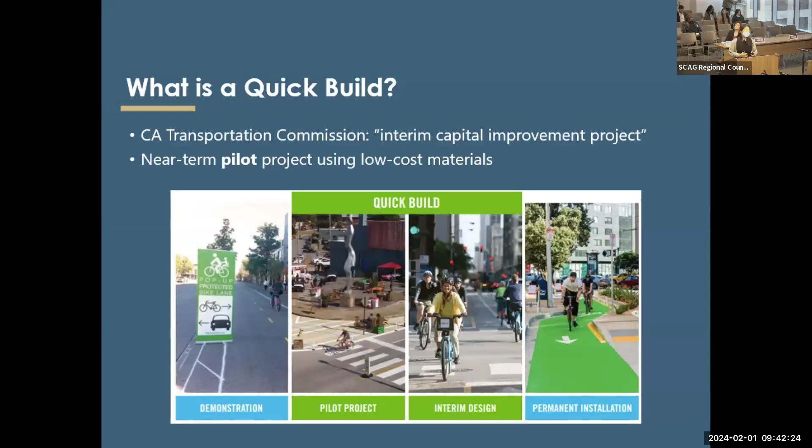So quick builds fall in the middle, a pilot project or interim design, again using those low-cost materials, which I'll get into in the next slide.

Getting into the elements of these low-cost, easy to implement or easy to uninstall elements: for protected bike lanes, you can put that protection either with planters or parking or using plastic posts. For a traffic circle, using rubber curbs, plastic posts are very handy for various types of projects, also using signage. For a protected intersection, you can use paint and plastic posts to create curb extensions, inputting temporary pedestrian refuge islands, or using pavement markings. Also there's temporary transit platforms and interim shared spaces such as pedestrian plazas using barricades.

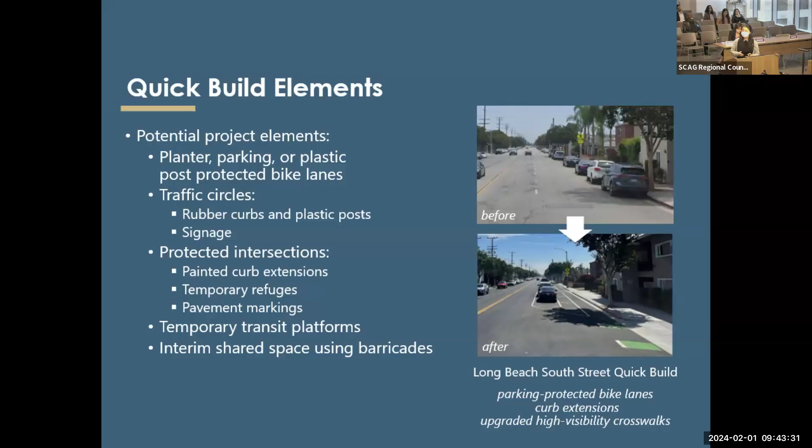On the screen on the right, there's an example from the city of Long Beach on South Street. The top is the before - there are 2 lanes of vehicular traffic and curbside parking. With just some paint, the city was able to implement a parking protected bike lane. Outside of the photo, they also installed curb extensions using paint and plastic posts and upgraded their crosswalks to be high visibility.

The quick build process starts with extensive community engagement, also to understand existing conditions and what are the community priorities and challenges along a specific corridor or project area. All of this engagement informs a quick build design, and then a jurisdiction will implement the project. It can range anywhere from a couple days to maybe a month or two, depending on the scope of the project. After implementation, a key part of quick builds is to have evaluation.

Evaluation can take place anywhere from 1 to 3 years post-implementation. Really the goal of evaluation is to inform next steps, whether it's modifying the project, removing the project due to the actual materials reaching their end of life, or going through a process of refining that design and maybe getting a permanent installation. That process typically takes 1 to 5 years.

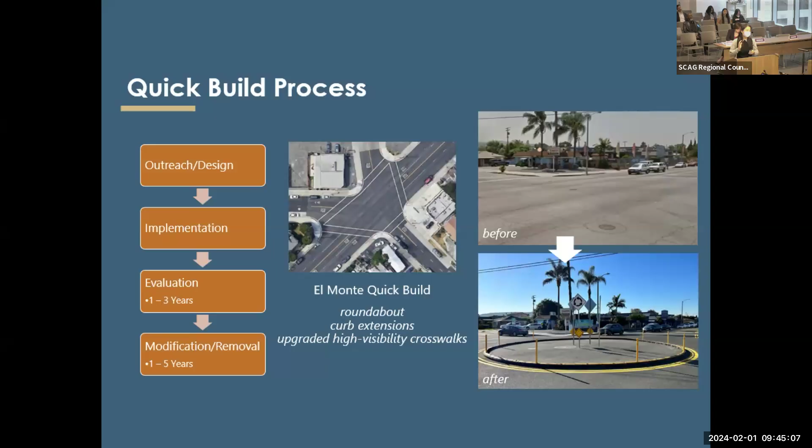Another example on screen is in the city of El Monte. They implemented a quick build roundabout. You'll see that the intersection is a bit challenging, with 5 approaches at a stop controlled intersection. So the city is piloting a roundabout using plastic posts, rubber curbs and signage. From the street view, you can see that intersection has a lot of open space, but with this roundabout, they're able to fill that space and help direct traffic. The city is in the process of implementing that, and after about a year, we'll undergo evaluation.

So my last slide for this introduction, I wanted to share some of the projects going on in the SCAG region. We've got a few completed in Beverly Hills, Calexico, Hermosa Beach, Long Beach, Los Angeles, and Ojai. I wanted to show some photos, a little more interesting than just talking about them.

So on the top, city of Ojai used planters to create a parking protected bike lane. This is informing an ATP grant application for them to figure out what their final design should look like.

And on the bottom, in the city of Calexico, their quick build is a pedestrian plaza where they blocked off a street with barricades, and partnered with the Bloomberg Institute to add street art to really activate the space. Again, we've got a few in progress.

So the photos I showed of El Monte, we also have projects going on in Pasadena and Glendale. And finally, projects in progress and upcoming for installation, currently in the design and outreach process, in the cities of Pomona, Los Angeles, and Santa Monica.

So now I'll turn it over to Margot to talk about a more detailed process for the city of Los Angeles. The magic button—it's that right one.

Okay, yep, excuse me. Good morning, really an honor and a pleasure to be here. I purposely wore red—it's a gray day out there, and I see a lot of black, so I wanted to make sure I stand out. So welcome, everybody. Hope to keep you on your toes for the next 15 minutes or so.

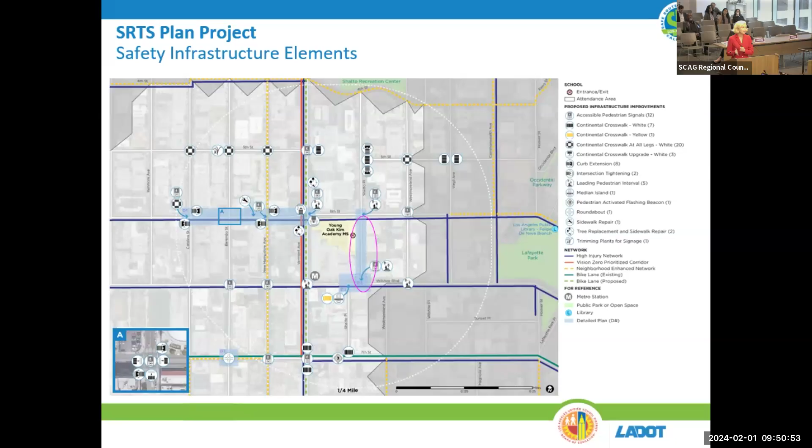Punchline, the answer is yes. So what were the issues we were dealing with on Shatto Place, where the school's main entrance is? The school is on the right. On the left side of the street, we have the headquarters for a union organization, a lovely cafe, and at the end of the street, an apartment building with over 500 units. So the primary client on this block is truly the 800 student population. However, through the process of engagement, we really got to know all the diverse stakeholders.

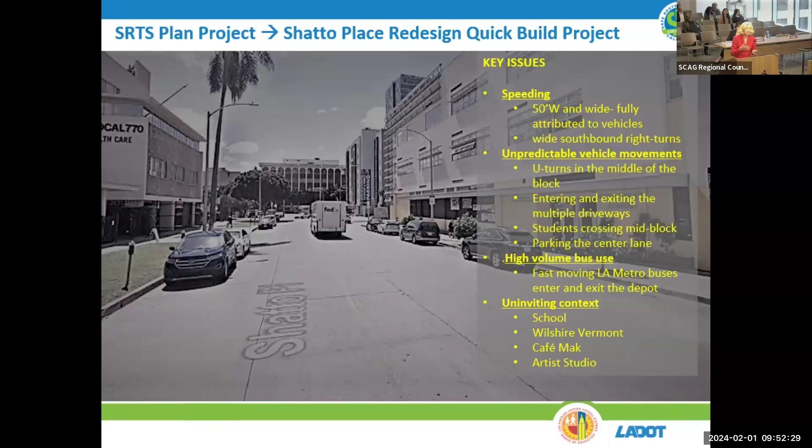What are the issues? Hopefully this looks rather noir, our black and white of Shatto Place, but there are couple key issues. One, it's a 50-foot wide street with some decaying striping, basically a 50-foot runway for anybody to travel how they wish. There's southbound traffic, northbound traffic, and a central lane used as parking for waiting parents, for delivery trucks annoyed with congestion, and multiple other uses. Many parents were observed doing U-turns as they came off the school curb, turning around and heading the other direction. Likewise, a lot of dropping off children on the other side of the street from the school, doing U-turns, and a whole mishmash of vehicle behavior, with 800 kids exiting a school making for a bit of a mess.

So we did some concepting. One of the things to drive home about a quick build process is you build time and labor into going through multiple iterations, because part of the joy of quick build is the iterative concepts. This is the one we landed on, our third concept plan. In brief, I guess you'd call that a peachy color.

We basically took out the parking lane on the west side of the street, right in front of the school's main entrance, and converted it into a pedestrian plaza area. We added a yellow lane representing a dedicated pickup and drop off lane, which operates only during pickup and drop off times. It is not a through lane. Then subsequently a southbound lane and a northbound lane.

To put this in context and think about why we're gobbling up street space for more pedestrian use: of the 800 students at this middle school, we did a student travel tally, and over 60% of these students use transit or walk to and from school. That's a fairly large population out there twice a day, yet that 50-foot width of street was solely dedicated to vehicular movement. So how do we find a better balance between the true use of mode use on that street?

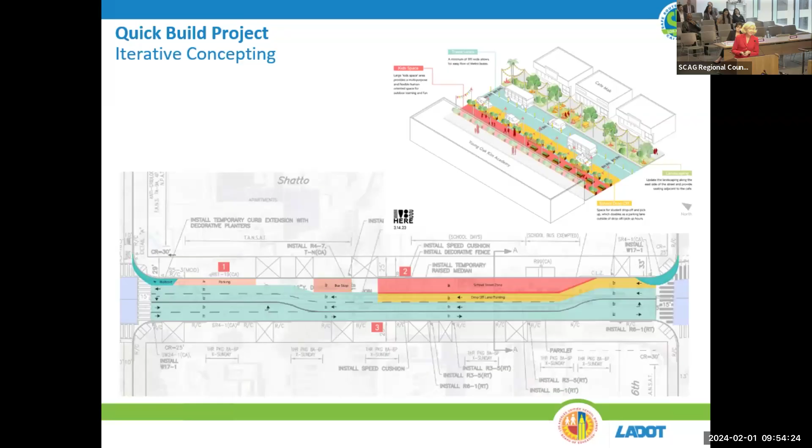And this was the design that evolved. In addition, we were testing out curb extensions on the north and south ends of the block, and we're pretty excited about this plan, as well as doing some additional greening.

So I'm going to walk you through several of the elements within this quick build project and why we were doing them. As I mentioned before, we're talking about a really wide, kind of unorganized 50-foot wide street. The idea was to streamline, organize, and make more predictable those vehicular movements so that when the kids came flooding out of the main entrance.

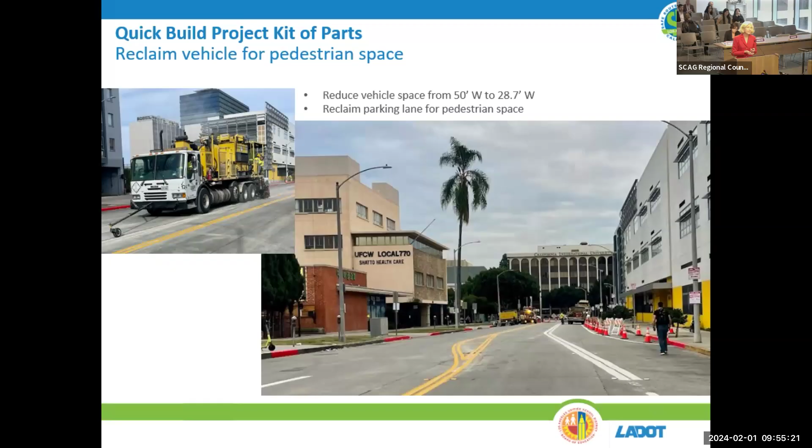So what you see is a double white line indicating the exterior barrier of the future pedestrian space — I'm sorry, where the orange cones are is the pedestrian space. The double white line indicates the valet lane, and then we restriped the double yellow line. Again, we took our vehicle lanes from 12 feet down to 10.5. So ultimately, we ended up with 28.7 feet of vehicle space as opposed to 50.

To reinforce where the vehicles go, we applied vertical delineators along some of those striped barriers. You'll see that the pedestrian space, which has the yellow polka dots, also has a vertical barrier, as does the barrier of the dedicated valet lane. So once somebody is in a dedicated valet lane, they are not leaving it, should somebody be a little bit slow at the front of the valet.

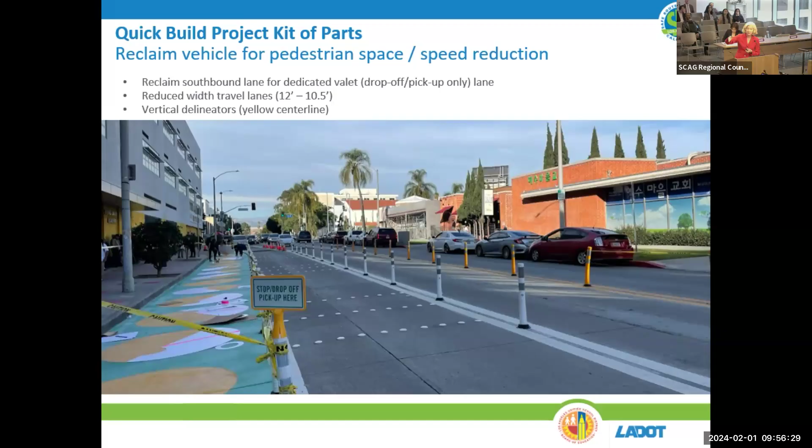Similarly, something new, we actually put yellow vertical delineators down the center line. It was really important to mitigate all of that unsafe U-turning. And what this does not represent, because it just went in yesterday, is that we have actually strung yellow plastic chain all the way down the center lane over those delineators, again to mitigate students getting dropped on the other side and trying to cross between the delineators. Similarly, we have strung the edge of the pedestrian space with a white chain.

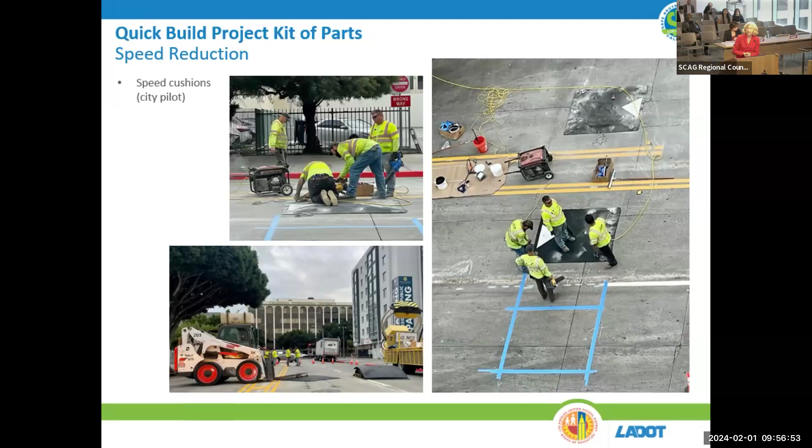Also, a great opportunity to pilot something that we in the city of LA have not done, perhaps some of your other cities already have, which is to install speed cushions or speed pillows, a quick and easy way, basically an instant speed hump. Good exercise in trialing those. We had 3 rows of those installed in the block.

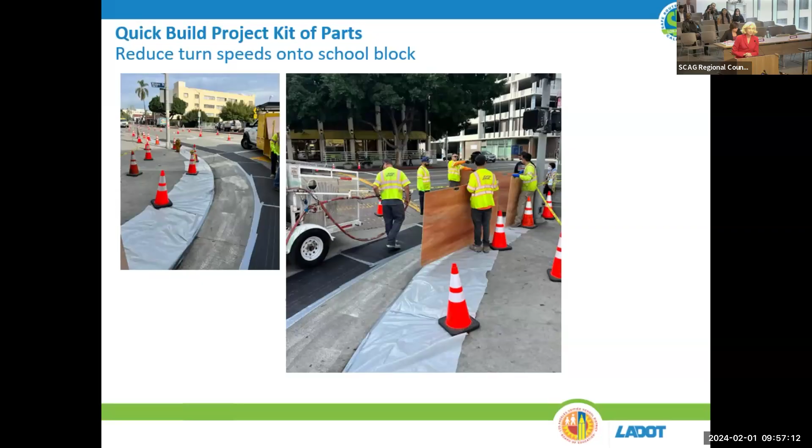Here are great crews at work installing the curb extensions. Generally, they are done with striping and some vertical delineators. We opted to also color them in with the same color of our pedestrian plaza for another punch of color on the corridor. And in the spirit of punches of color, it's one thing to do your pedestrian plaza below the curb - that's sort of a quick build way of grasping and installing a plaza. We said, why not run some of that colorful design up over the curb and onto the sidewalk?

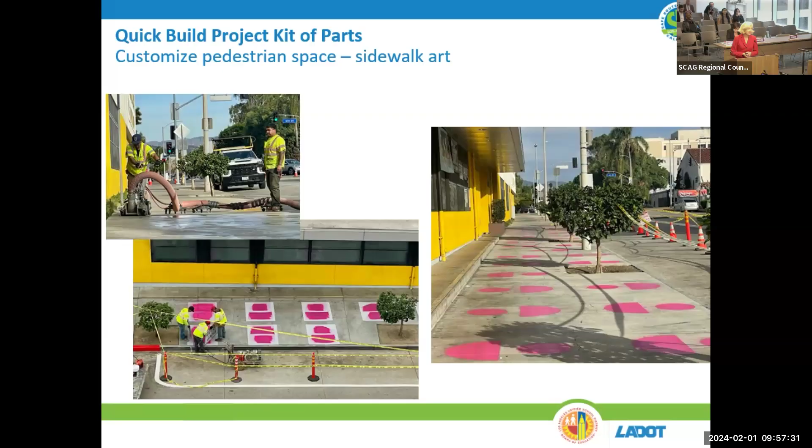So we stenciled a fun design on the sidewalk, which also connected with the yellow dots on the pedestrian plaza. And lastly, maybe I'll go back a minute - it's hard to see in any of these pictures, but along the sidewalk where this pedestrian plaza is, there are a series of about 7 very stunted orange trees.

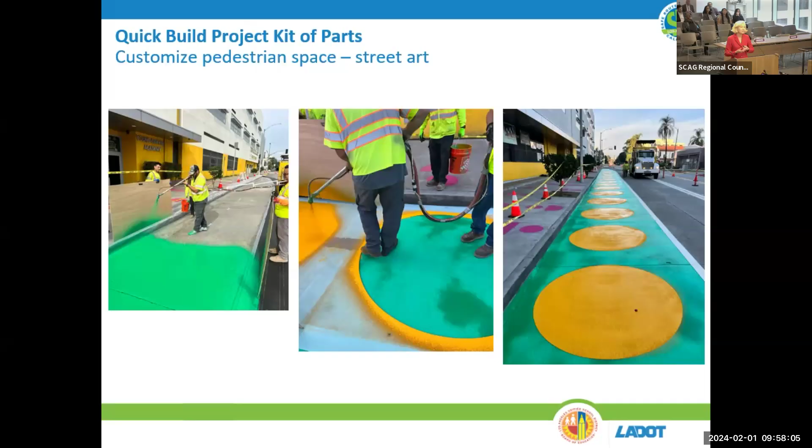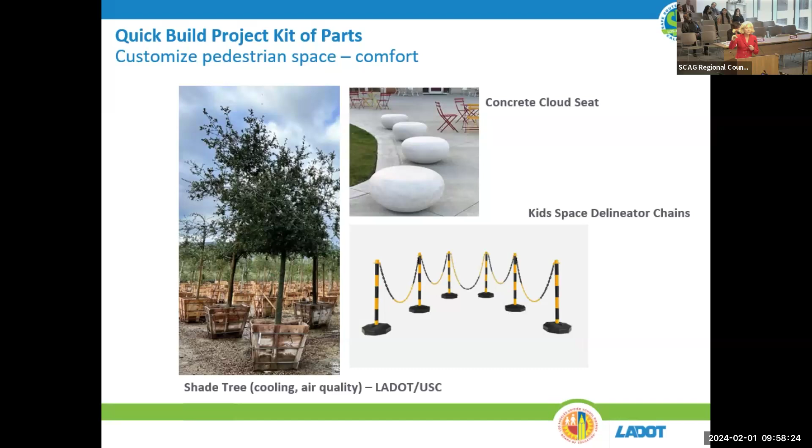And if we're thinking about the bigger context of what we're trying to change on the street, we're looking to change the context and the feel and the attractiveness and the invitingness. So we had those stunted orange trees replaced with quite large shade trees, which will then provide shade onto the pedestrian space. I referenced some of the plastic chains, and then those concrete clouds - those small seats will be interspersed along the sidewalk in the pedestrian plaza.

We were very fortunate that we already had a relationship with the school because we had been doing this larger infrastructure planning exercise, but we really embedded ourselves in the school. We attended a family festival where we wanted to solicit some art ideas for the pedestrian plaza. We had coffee with the principal so we could reiterate this, that the street will change - please be prepared. We also worked with the student government.

There were about 50 leadership students for the school, and it was really important that they use their vernacular and their words to promote the project and get the school ready for the installation of this redesign, because it meant a change in behavior in the way that the parents are driving, and parents don't want to listen to other adults. Maybe they'll listen to their kids, and maybe the kids, being middle schoolers, can influence each other. So they would make announcements, they helped at the demonstration event, and they even made a video that was very blatant about how drivers are to behave when the redesign opens. I'm incredibly proud of them with the video.

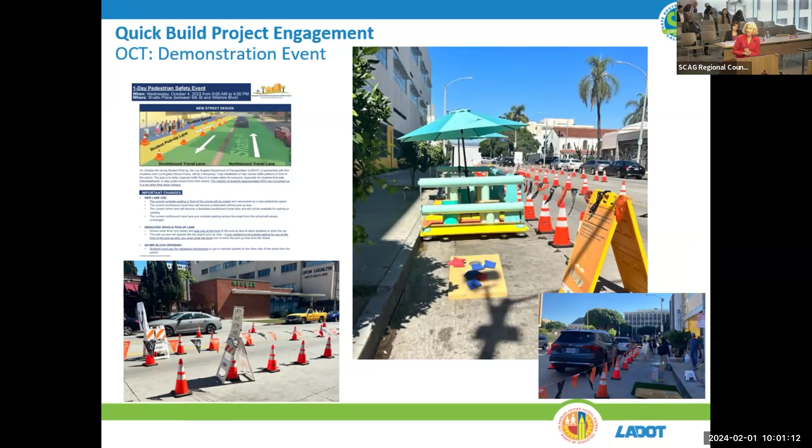We hosted a pop-up event, and a shout out to SCAG. We used your Go Human kit of parts, so you'll see the parklet example sitting there in the future pedestrian space. And we trialed it, as you see in the lower right-hand corner. We trialed running people through the dedicated pickup and drop off line, and have to admit that it went quite smoothly.

We ended up installing this project during the months of December and January. Looking at today's weather, I'm so glad we got in before these atmospheric rivers arrived. It took us approximately 7 days of work on the street to do the transformation.

As I mentioned before, it's just as critical to engage all the stakeholders, not only the school. I will tell you, it was challenging trying to find out how to connect with those people that are not in the school community. And nothing like throwing up a road closure sign, or at least sending out a notification that your street will be closed for a portion of time, to make people come out of the woodwork.

There's a lot of 'no, I'm not happy about this, what are you doing?' However, it was a really valuable opportunity for everyone to take a breath, to frame why we're doing this: the data of how many students are walking or using transit, the speeds on the street, the volume of traffic. I have to say, I was really pleased with the way all these non-school stakeholders really came around.

I think the other thing to remember is one of the first questions you ask is, well, are you happy with the status quo? And invariably it will be no. So the quick build really is that great opportunity to say, status quo not working, great. We may not have the full solution, but let's test it, tweak it, observe it, evaluate it. If it's a mess, we'll pull it back out, but we have learned. Why stick with a status quo that doesn't work?

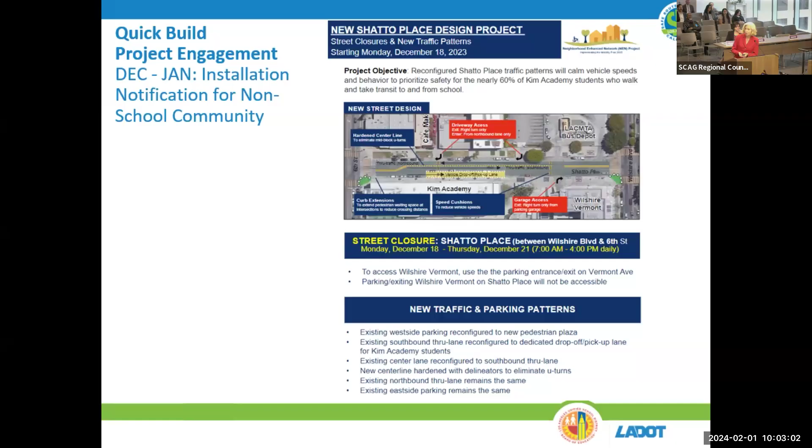In January, after the field crews had put things in, the leadership students had a contest to see who could go out there to help customize those yellow dots with faces. So that was a fun day.

In the spirit of evaluation, I'm happy to share this, it just got texted to me last night because we just got the data: there was literally a 50% drop in the number of cars that were going over the speed limit, and the max over the speed limit dropped from close to 40 miles per hour to 29 miles per hour. On the first day of opening this, there was no honking. I think the principal was sort of gobsmacked at how organized the street was. So kudos to all of my team. It truly takes a village, but pretty impressive takeaways.

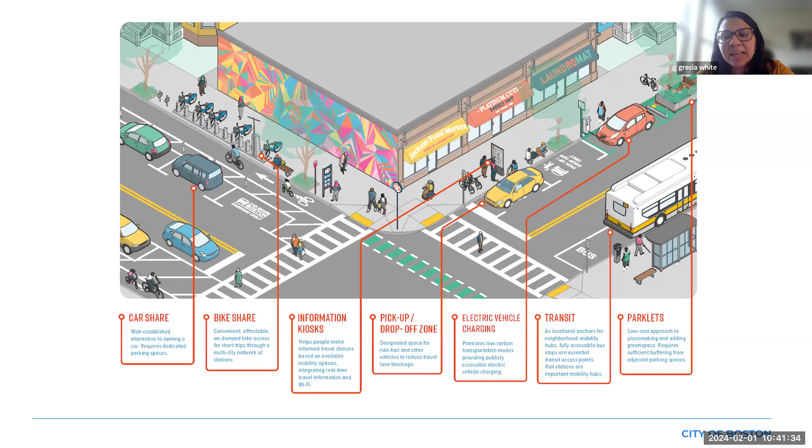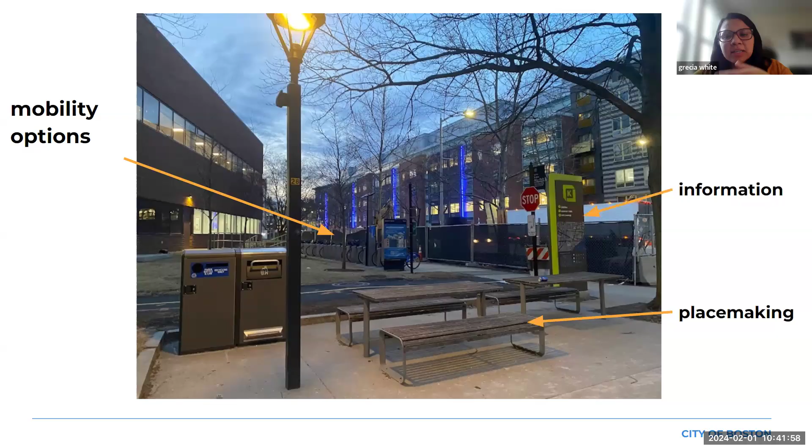But things look different in the real world. This is actually an example of one in Cambridge here in Massachusetts. It's not branded as a mobility hub, but once you know what to look for, you start seeing them everywhere. You have the mobility options—that's a bike share station in the back. There's the benches, there's the information kiosk, and then there's a bike path behind the benches. There's even the trash can and the lighting.

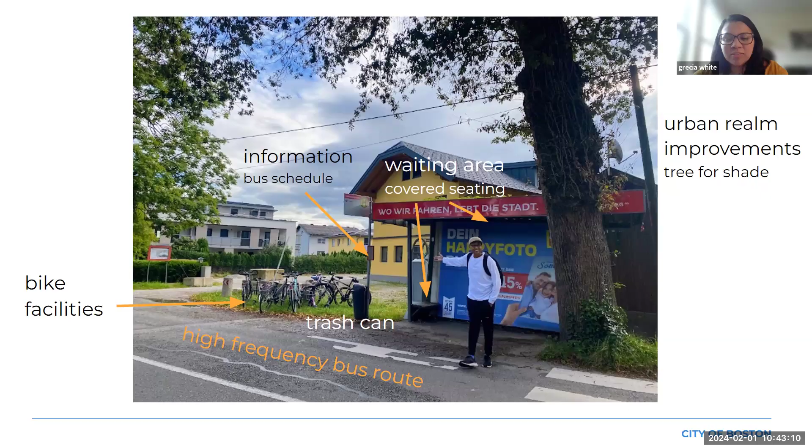So again, they can look very high tech or very low tech, but it's all about providing essential services to people. What I really want to get across is that there is not a one size fits all. As you all look to create your own mobility hubs, remember these are going to look very different, even neighborhood by neighborhood, city by city. Don't be afraid of that when designing them—as long as you're conscious of the land use and the needs that people are expressing, you should be okay. But don't be overwhelmed by how different they can look.

Now, going into our pilot, we produced a guidebook that's a resource you can take a look at. It includes different typologies—we separated mobility hubs into three parts: gateways, squares, and points. Gateways are kind of the gateway to a neighborhood—areas that are very busy, with lots of activity, commercial use, and residential use.

The squares are a little bit deeper into the neighborhood—there's still some activity, but not as much. And then the points are very embedded in the neighborhood, typically away from major transit corridors.

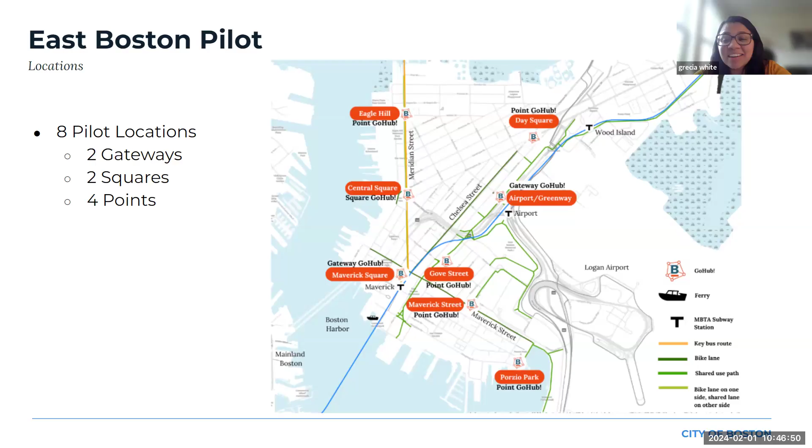Here's the quick overview of all the amenities we added. Again, it's a mix of active mobility, some car use amenities like car share and pickup drop-off zones, and then a mix of placemaking amenities. So even within the 8 Go Hubs we installed, all in the same neighborhood, they each look different. I really want to drive that point home.

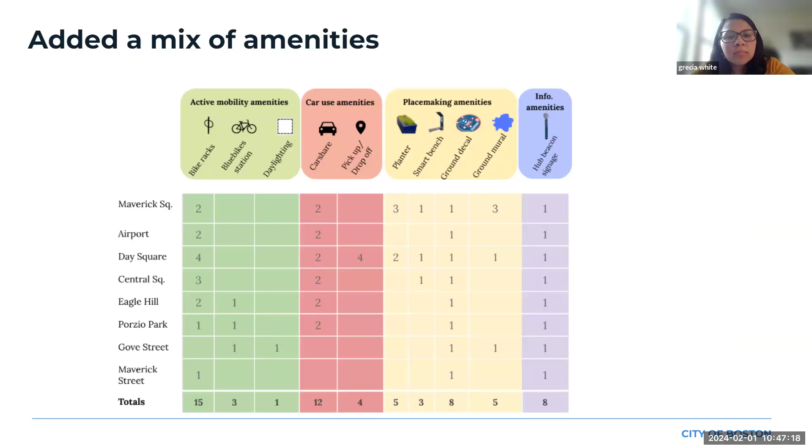This pilot took place in 2021, so the community outreach happened in the height of COVID, and unfortunately we were limited in what we were able to do. But one really useful thing we did was conduct a community survey in partnership with a local organization. About 400 people were surveyed on what they would like to see, what we should be adding, and what we should be focusing on.

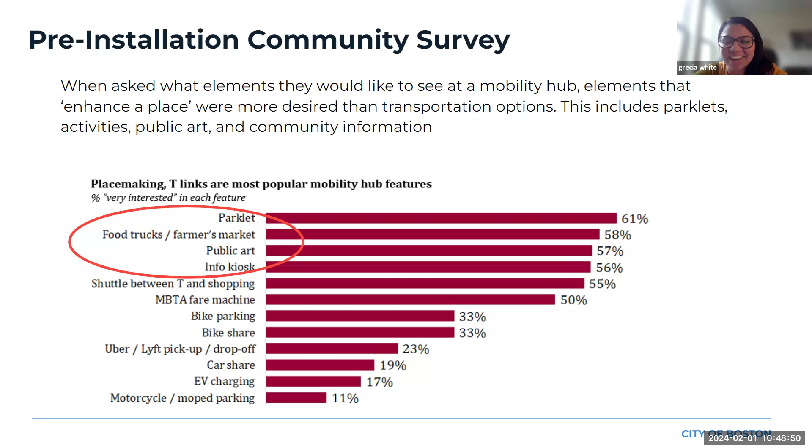What we learned was that people were very interested in the placemaking amenities, the parklets, community spaces for farmers markets, and things like a food truck park. The things they were least interested in were the mobility things like car share and EV charging, which was kind of interesting. This is helping guide our work moving forward.

Focusing on the lessons, we primarily used data from our bike share network and car share usage to evaluate the pilot. We would have liked to use pedestrian or bicycle counts, but we just did not have that data. Going forward, if you were to have your own mobility hubs, I think that could be a really neat data source to have.

Here the lesson was that at stations farther deep in the neighborhood, like Eagle Hill and Porzio Park which I pointed out before, had the greatest percentage increase in the bike share system, and these were not near any subway station. It makes sense intuitively, we added more transportation options to an area that had very little, so people started using them right away, which was nice to see. These were brand new stations.

As for the car share aspect, overall in Boston we saw car share numbers decrease across the board, reservations went down, miles went down, both in the Go Hubs and the overall city, and the number of unique users also decreased. But if you look deeper, Eagle Hill, that very embedded neighborhood Go Hub, actually saw an increase in the number of car share reservations.

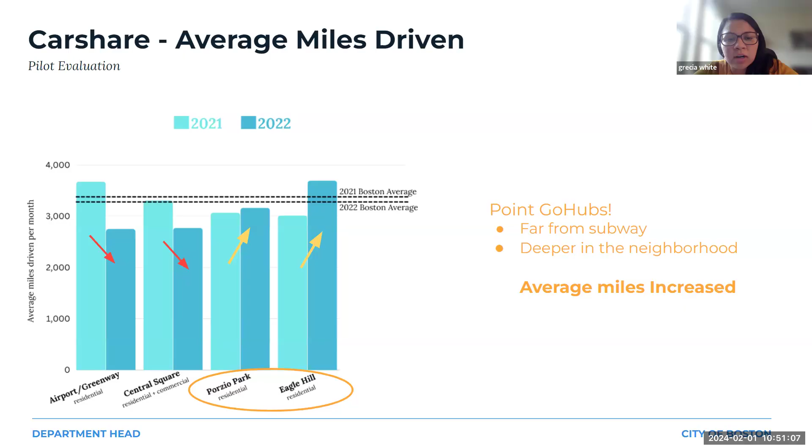So again, this makes the case for focusing on those neighborhood places, because we also saw an upward trend in miles driven, both in Eagle Hill and Porzio Park, and even in unique users. Eagle Hill saw an increase, but Porzio Park, while it did see a decrease, it was less so than the others.

So as you're looking to develop your own mobility hubs and sourcing information on how to plan for them, something you'll often come across is that mobility hubs are often anchored by a train station or a high frequency bus stop. However, while that is important, we also cannot forget the other parts of the city, like how people are getting to these places.

So providing things like car share and bike share in those quieter neighborhood streets is also very important.

Additionally, we will be prioritizing adding more placemaking amenities like planters, which are painted blue, so I would like to see more color going forward, and even including other things like shade canopies. The previous person mentioned climate change. We're dealing with that obviously everywhere, and Boston is not exempt.

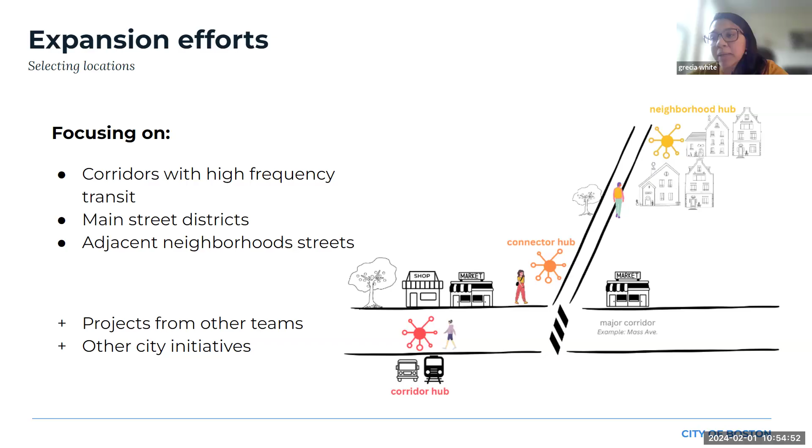Again, in terms of locations, we really want to focus on both the hubs located along major corridors where there's a lot of activity, like Main Street districts, but then also the neighborhood hubs. One way we're thinking about it is that for every one corridor hub, there will be two neighborhood hubs to help support it and bring people to it. We're also looking at what other city departments are doing and how we can piggyback on their efforts and initiatives.

And that is all I had. I hope that was helpful, and I am more than happy to answer any questions.

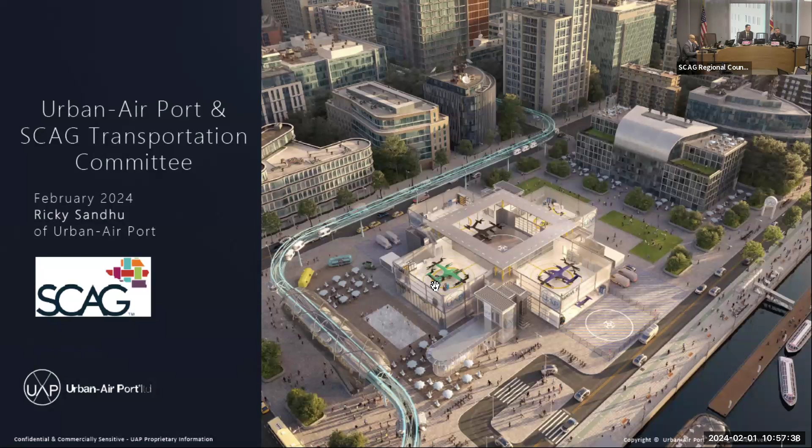Thank you. Good morning, Vice Chair, Judge, and Honorable Transportation Committee members. Today we have the pleasure of finding out about Urban-Air Port, which is an international advanced air mobility infrastructure company, represented by the CEO and founder, Ricky Sandhu.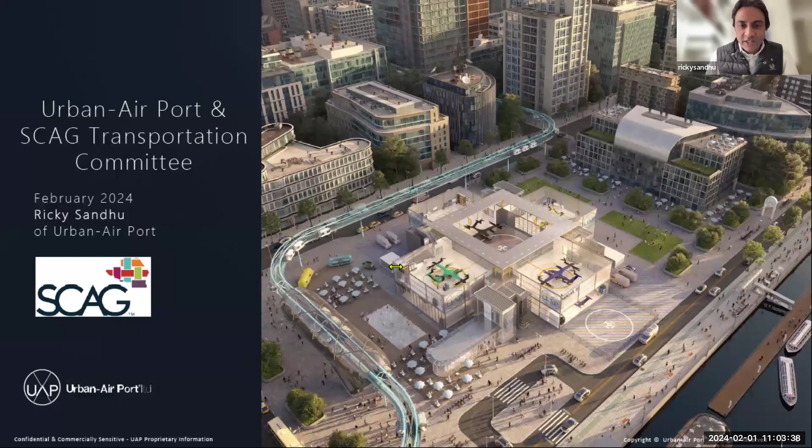Well, first of all, thank you for having me. It's a great pleasure to be here this evening. And actually, Hiroshi, it's only 7 p.m. in England, so it's not too late.

It's funny, I find myself sitting here exactly where I was sitting a few years ago when I first met Mike Whitaker with our partners at Hyundai Motor Group and Supernal. Mike's now the administrator at the FAA. So this industry has gone from being an idea to a really serious industry that's really going to help cities all around the US and around the world be connected better.

Our goal at Urban-Air Port is to enable that new form of sustainable aviation to happen, and also to happen viably and sustainably, but also safely as well. Before we dive into the presentation, it's probably worth explaining who I am and why I'm qualified to have such a business. I think that stems back all the way to my training as an architect.

I used to work at a company called Foster & Partners, one of the world's leading architectural and design practices. I spent a lot of time designing buildings, super high towers, high-speed rail stations, airports, master plans. I left that practice, sadly, because I really thought we spend a lot of money on our buildings and there's a lot of innovation in our buildings. But what if we spent that kind of quantum of cash - for example, the Bloomberg building in London was £1 billion - what if we spent £1 billion or $1 billion US on the bits in between the buildings? That's where we became very passionate about investing in the bits in between the buildings and enabling them to support sustainable, net zero, and emission-free types of transportation. So Urban-Air Port was formed to enable one such form, which is advanced air mobility and electric vertical takeoff and landing aircraft. If you can go to the next slide, please.

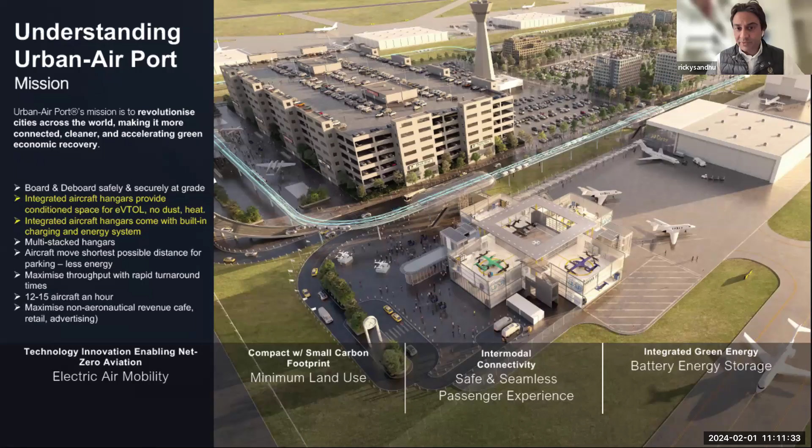But then also you have the electric aircraft that are also landing elevated, so that they're not so noisy in terms of the perception of this new kind of helicopter, this new eVTOL sound. But they're also very safe, because you're not having to board an aircraft in a high exposed windy location. So having this ability to integrate all the necessary functions in a very compact footprint is something which is very unique, and something which we believe is going to scale across the US and also many other cities.

So we had 15,000 people. We had 150 successful flights, and we were flying. We were releasing aircraft to fly and receiving them to land within a very confined civil aviation controlled airspace. So this is a fully integrated mini airport for electric aircraft in a very dense downtown city location. And this was the first time in the world that this has ever happened.

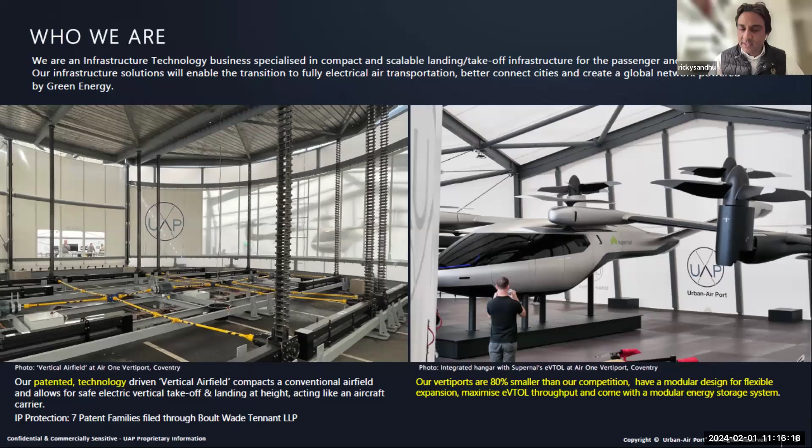We had our own command and control centre, and we built our own vertiport AOC, which is the kind of platform where we can see what's happening across the airspace, but also what's happening inside the facility. So it was like a mini airport. We were lucky enough to be able to design it, to build it, but also to operate it as well. So that gave us a lot of experience, which is really, really valuable as we now move on to our next generation technology. And the next slide, please.

Transport infrastructure is always very expensive. And so we have an opportunity here, we have a very innovative new type of transportation vehicle. So it's only right that we also work hard as infrastructure designers to serve that new technology with a cutting edge new type of affordable, scalable, safe vertiport infrastructure. And so that's what we have.

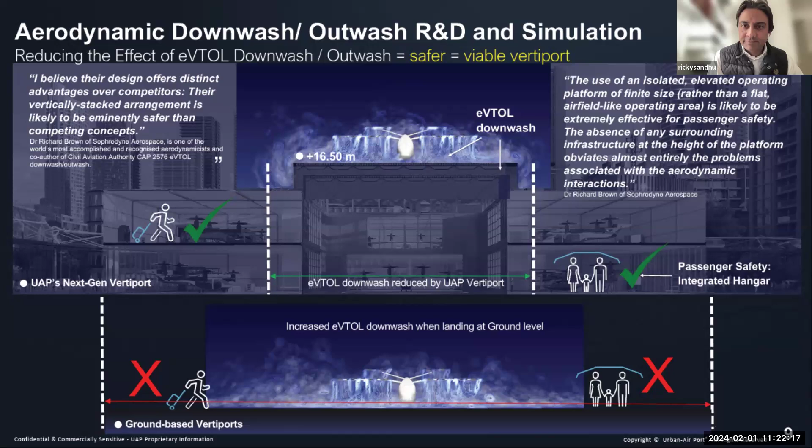These are really important factors that we deeply understand, and we've invested millions of dollars and pounds into our R&D and our technology. There are some real benefits here that really need to be understood so that we can integrate these vertiports into towns and cities all across California.

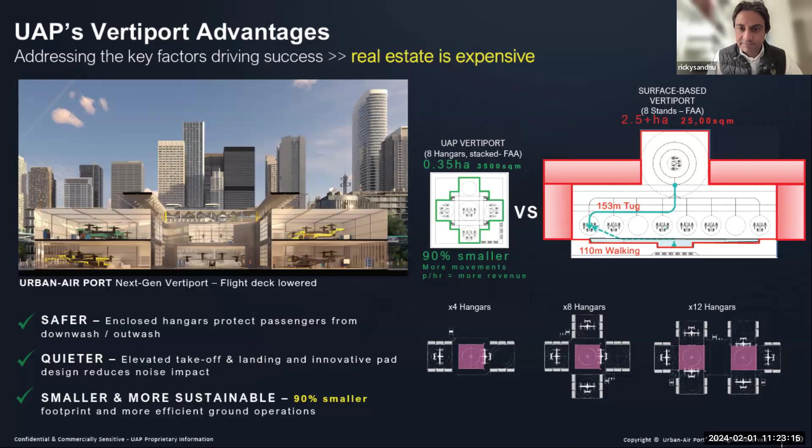So I think this is just a summary, just reiterating again, real estate is expensive, right? No matter who says real estate is not expensive, whether it's an airport or downtown, real estate has value. So if you can do more with less, that's obviously going to be advantageous and more desirable, and that's going to win the day.

So the business case has to stack up, the fare prices have to stack up. If you can have lower landing charges because you've got a more efficient operation and you're taking up less space, and you can provide more capacity, better connectivity, and more intermodal seamless options for people, that in the end is going to win. But it all boils down to having that compact solution.

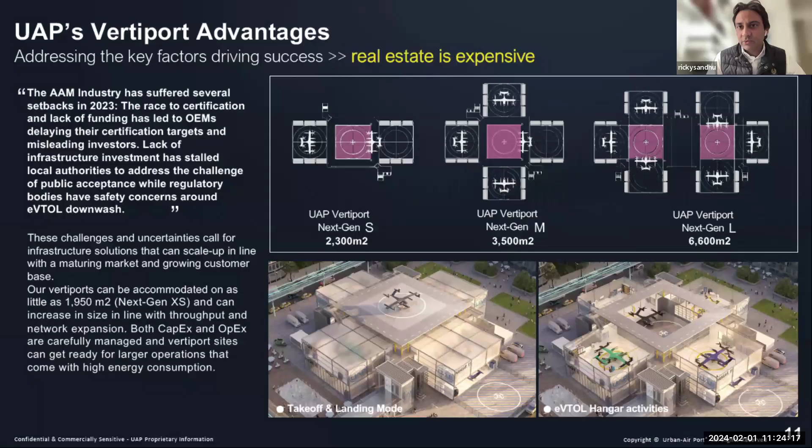Now, of course, you can scale. If you have more passengers traveling, you can add more hangars. It's a scalable solution. If we go on to the next slide, I'll try to speed up through the next few slides, but I think we're almost done.